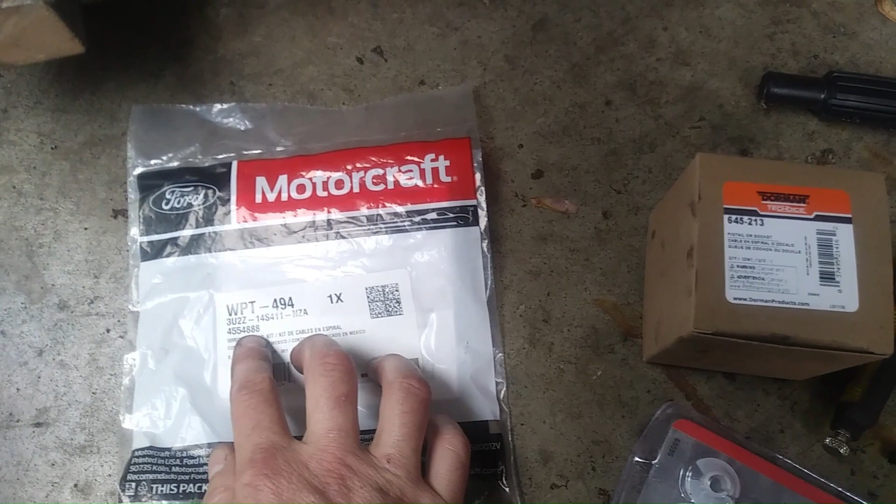There's two connectors. This is one - it was actually about $30, which I just bit the bullet and bought. This is off an 04 Mustang. There's two different styles I've seen. This one has two pins that clip over it. There's another one I've seen that's like a round barrel that slips over two threaded studs. That one seems to be a little more common and cheaper, but unfortunately I got the more expensive one, so that's for the backup lights.

This is a Dorman part number 645-213. This is the one for the speed sensor.

So I was just watching Pierre's videos - he has videos 1 through, I think, 17 or something. In his SWAP video number 6, he goes over the transmission. His car is an 03, this is a 2010. He also has another video on 05 plus cars having to do one more wiring fix up at the ECU. I think the reason is what we're about to go over.

This rear sensor is the vehicle speed sensor for the speedometer. If you look, it has two pins, but there's two blades on top. This one right here, underneath this little bracket, I think is the sensor Pierre's talking about, which is missing on the older cars. This is a 2010, so it has this, but older vehicles don't. So I think this is what the ECU is looking for, and the workaround up at the ECU end is getting around that.

So we're going to do that later. We're going to look for this connector, and they look very similar actually. You can see these ones are wider and pointing to the side. These two ears are narrower and pointing up. So we're looking for this guy, and then this is your reverse park neutral.

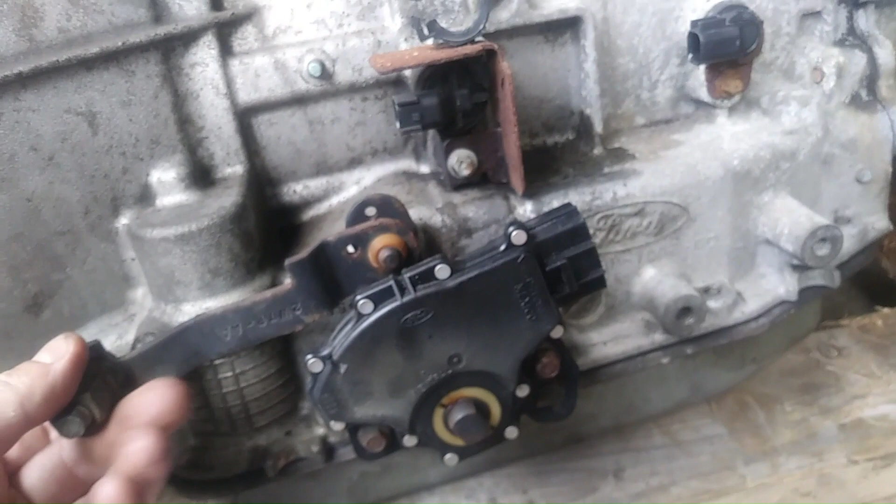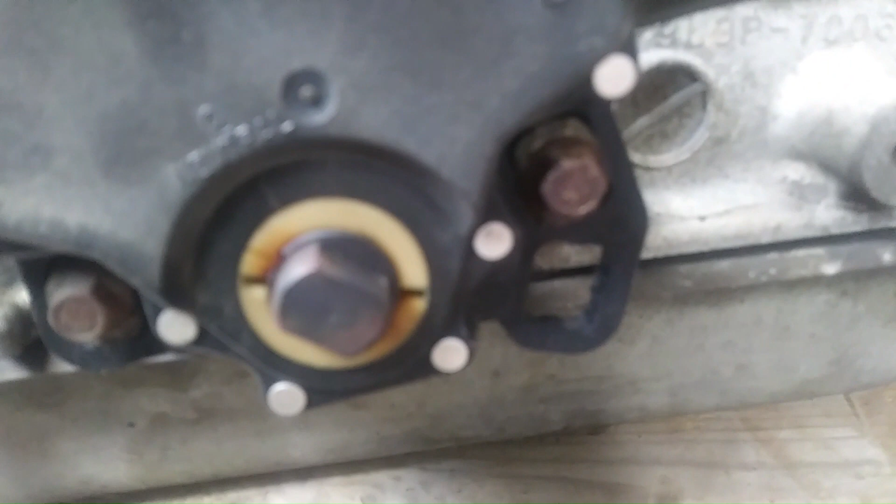You can see here on the side it says neutral, and there's a line, and a line on that yellowish white, so I'm going to pull on this. It's changed gears, and you can see the little straight edge is no longer on neutral, so I think that's low gear, like first gear, whereas all the way back is park, and then that's reverse. One click up would be neutral, and neutrals are aligned. Drive, and there should be second gear, then first gear.

So what I need to do is, when we're in reverse, which would be one click all the way back, we have to find on the connector that slides into this guy underneath the car - there's two pins that we have to get.

So the first thing we're going to do is just focus on the speed sensor. That's easy - all we do is cut the connector off the car harness and solder on this connector, and that's all that is. Very easy. That's what we're going to try and find and do.

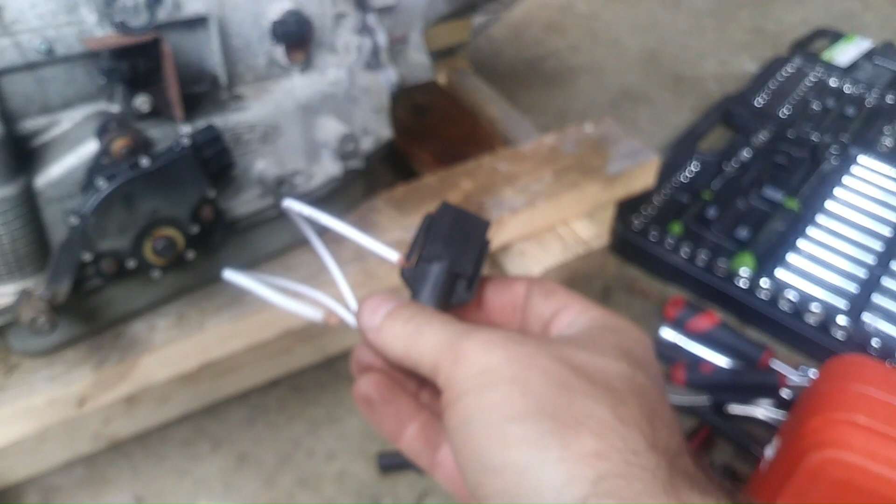So here it is here. Pretty straightforward, just two wires, and it shouldn't matter which one goes to which. They're both white, so either wire can go to either wire, I think. So all we're going to do is cut the connector off the car harness and solder this guy in, and then find which pins we need to tap into to get our reverse lights. So let's work on that a little more.

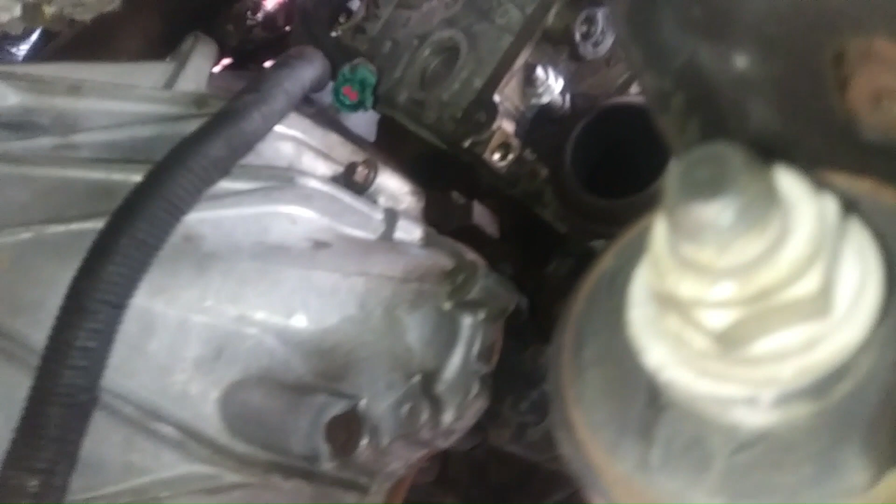Alright, we're under the car. As Pierre said in his video, on the older cars this harness comes out with the trans. On newer cars like this one, it stays with the vehicle. You can see up there, that green one is for the upstream O2 sensor on the passenger side, and then this length jumps over the hump to the other side, and now you've got your other green for the driver's side.

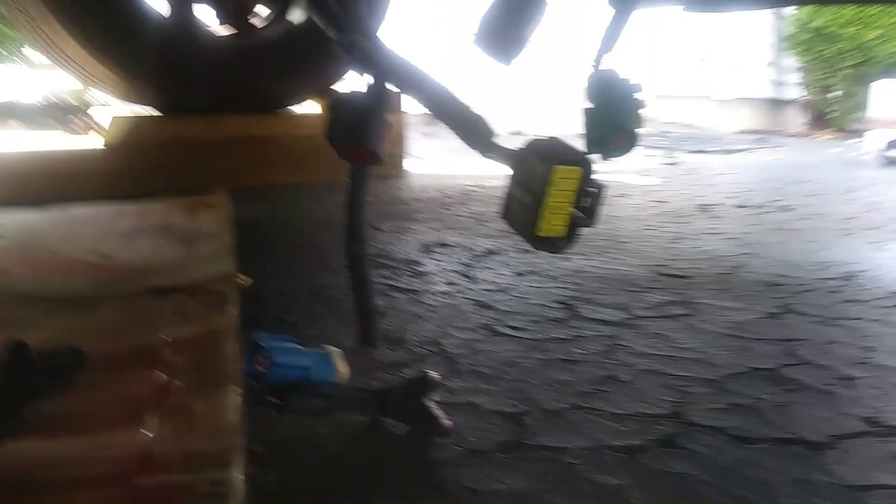Upstream sensor. The blue connectors are for your downstream - there's one, and then there's another one over here. So there it is there. This guy we're not going to use because that plugged into the spot right behind the fill tube, the fill dipstick, on the automatic. So I'm not even going to bother with that.

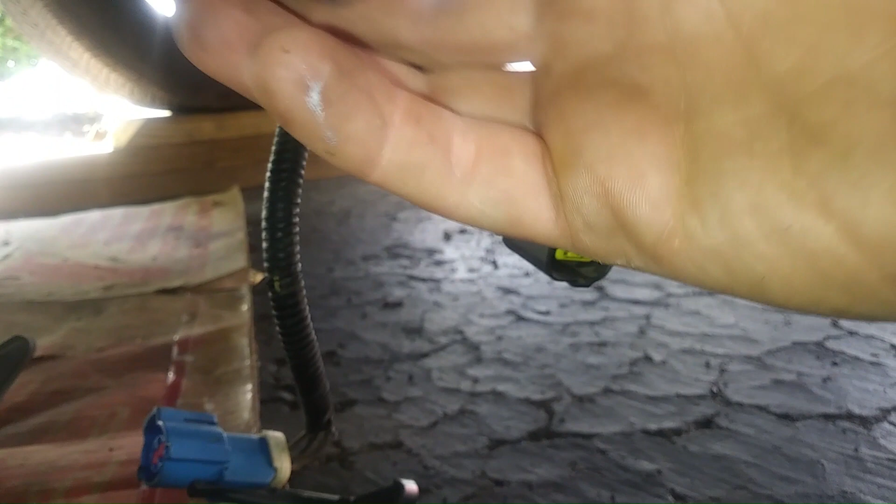And so then that leaves this guy. This is the one we've got to find the 2 pins for the reverse lights. But then there's these 2, so these are the 2 we've got to figure out which one is which. And if you remember, it's the one that's got the narrower of the 2 blade spades on it.

If we look right in here, you can tell that the one on my left hand. Let's just verify that one more time. I've got the spade blade thingies, the alignment keys, facing up. The one on the left is the one we need because it's skinnier. It's got the skinnier one, and those ones are wider.

But also, the skinny one runs up and down. See how the red... is it one on top of each other on the left, or is it on the right? They're next to each other, up, down, left, right kind of a thing.

So let's just verify on the transmission again before we cut this off: the connector pins run up, down with the alignment key blades, and the other one, the wider one, would be more of a left-right configuration. So let's go back to the trans.

So if we look, yes, I'm not sure if you'll be able to see that, but you can see the skinny ones are going... so here's the direction of the key, up down, and the pins are up down.

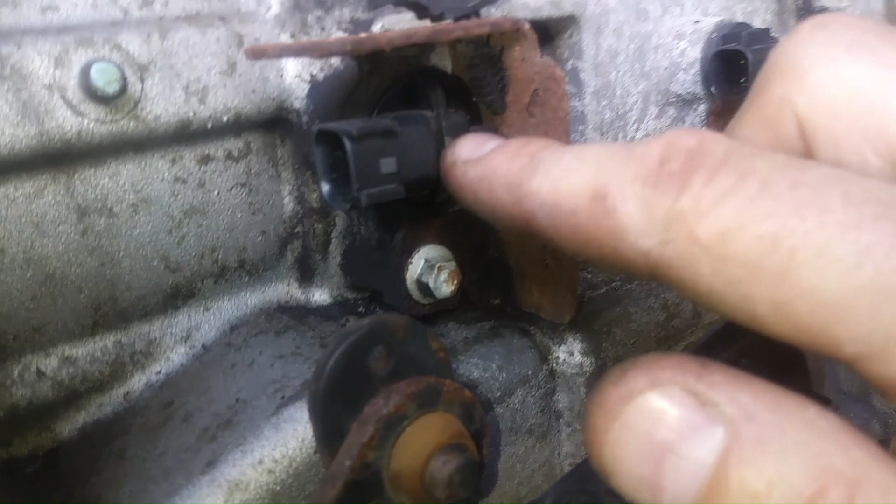Whereas the front one, which is the one we don't want, you're really not going to be able to see that because my camera lens is on the right side. But this one's got the wider spades, and it's left, right. So it is that one.

Okay, so let's cut that one off and solder in our sensor here. I don't think you need to see me solder it, but we're going to do that with the shrink wrap and the heat gun. So I'll get that one done.

All right, so we've got the vehicle speed sensor, the speedometer one, soldered in. So that's done. Now we have 4 more wires to worry about, for 6 wires total. Those remaining 4 are going to be on this.

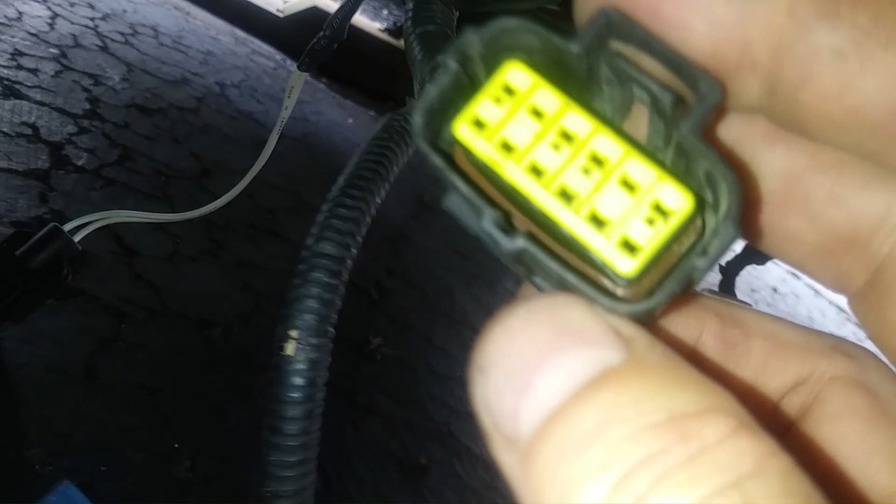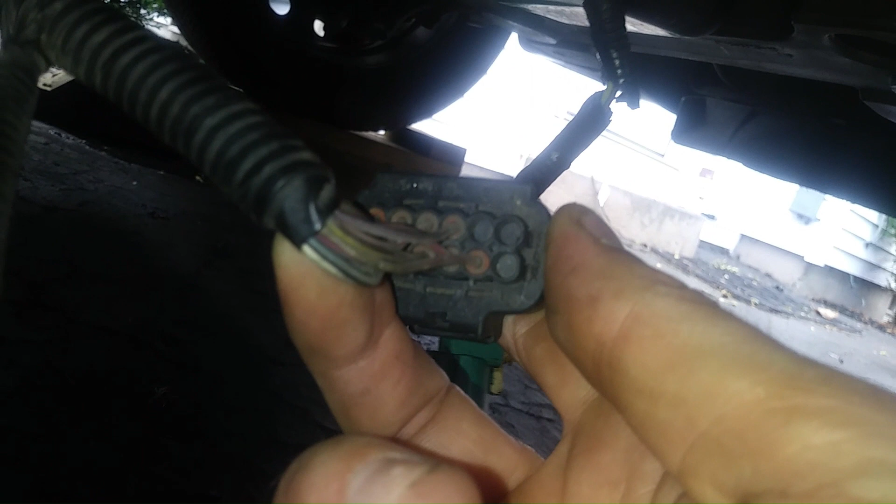This is the transmission range selector. If you look, you can see that there are 2 on the upper row and 1 on the bottom row that are unused. So we're gonna just flip it like this. That means that on the bottom right, those 2 are unused now, right?

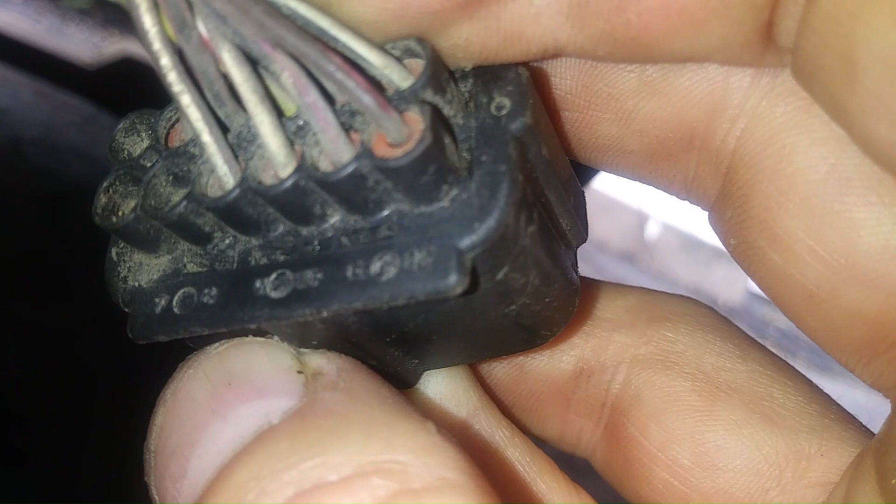Yeah, and if you look closer, you can see that there are numbers on it. You can't see, but well, yeah, you can see: 7, 8, 9, 10, 11, 12 is what that says. See, 12 is right there, 11, 10, 9, 8, 7. So 10 and 12 we have to jump together.

So 10 and 12 is going to be this one, 11, 10, and then so that one, you know. So 10 and 12 would be for either, if you're going to run a clutch switch, a safety switch, you would basically take this corner one, skip one, and go to that guy. So that's 12, 11, 10. And you'd clip them from here, and then you could run 2 wires up to your clutch pedal, to the clutch safety switch.

Or you can do what I'm going to do. This is the less safe of the options, but I've never had a vehicle with a clutch safety switch, and I'm used to driving them without it. Plus, I like starting the car with the clutch out, so you're not stressing the throw-out bearing and all that stuff when trying to start the car.

So all I'm going to do is for pins 10 and 12, cut the wires maybe about 1 inch up and then solder them together on the harness side. That'll be my clutch safety switch, or safety switch. But if you're going to do that, remember that the key will start the engine regardless.

So, you know, be careful with that. Just keep that in mind. But that's okay because that's what I've always done. So I'm gonna get that done. Then the only remaining thing is the reverse lights, which we'll talk about in a second.

Okay, so what I've done here is the pins 10 and 12 I trimmed.

All I did on the harness side is twist the wires together, solder them, and then put two pieces of shrink wrap over it. So now our clutch switch has been, I guess we'll say, bypassed, and the car will start.

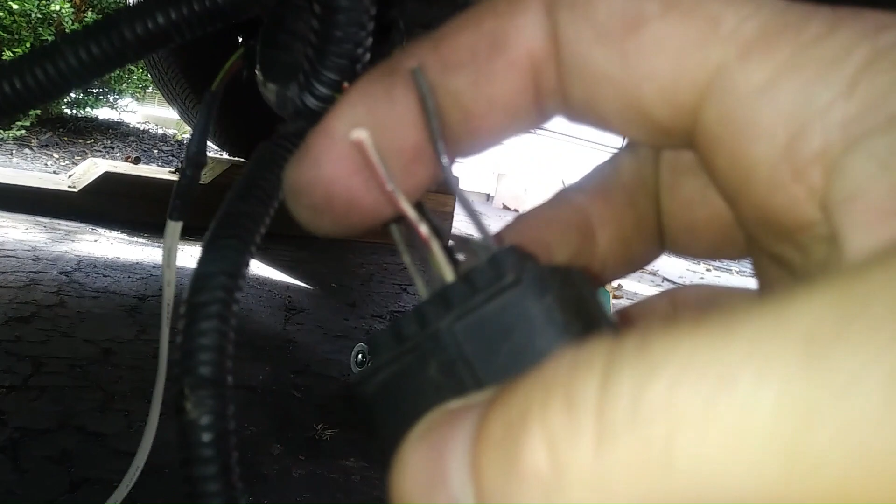The only remaining two wires we need—remember how I said there were six—we've got two here, two right there, and the remaining two are on this connector as well. We'll tuck these to the side, and if you look, there's only two more wires on the bottom row, and those are the ones we need. So 10 and 12—12 would be the far right one, 11, 10—so 10 and 12 we did, but now we need 9 and 11. Remember, too, 7, 8 we don't use, so 9 and 11 are the other two we need. Number 9 is power in, and number 11 is to the reverse lights.

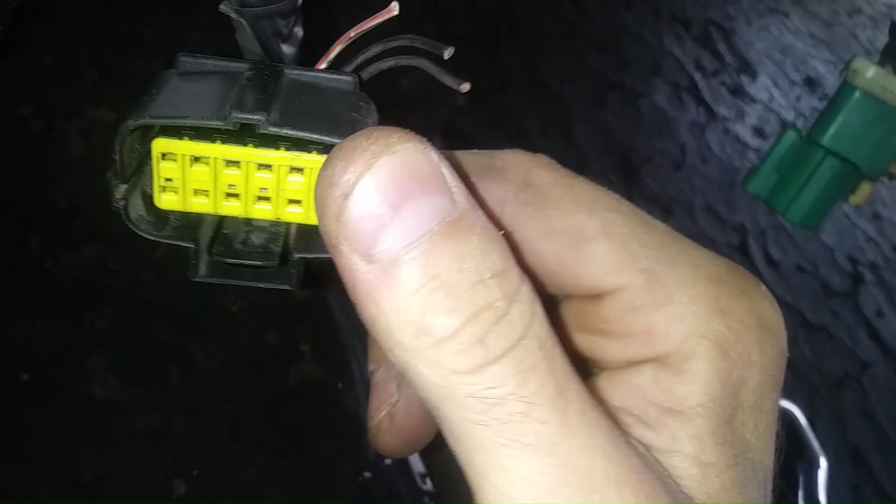What I'm going to do is unbolt the switch from the automatic, plug this in, and zip tie it up there. And then the other two wires are these two. All we did, if you remember, is snip off the automatic transmission connector and then connect this one in. It didn't matter which wire went to which. So that's the wiring you need to do.

What I'm going to do now, since it comes down the passenger side—since I don't have the cross member in, I've just got the jack, and I've got a lot of room now. The transmission is low, almost hanging off the motor mount, so I'm just supporting it barely with this. I'm going to loop the wires up over it, get everything connected, secure it a bit with zip ties, and then we're going to put the cross member in.

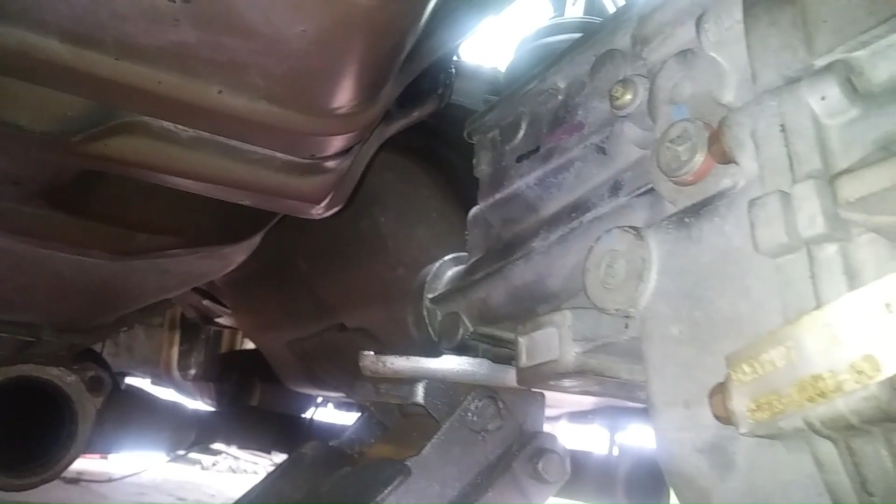All right, I've got the transmission in. It's all in there—cross member's back in, transmission mounts in. I lined up these holes; these are the two transmission cross member bolts, and those are in. I can show you what I did here.

There's the wiring loom for the transmission right here. You can see it's not caught or pinched—it's low enough so we've got clearance. Here's the upstream for the passenger side, and the downstream for the passenger side right there, and that's not going to be used.

We got the cross member in. See how we had to bring these holes towards the back of the car? You can see that circle is where the automatic mounted, right there, but that's right now where our manual is mounted.

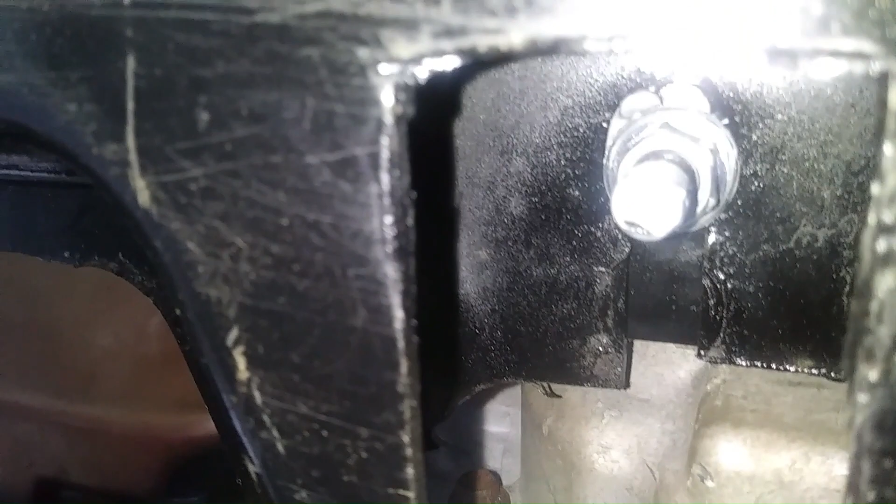This is the same transmission mount as the automatic from the Crown Vic—this is not a Mustang trans mount, it's the Crown Vic automatic trans mount. Same bolts as out of the automatic are holding it in. You can see that everything clears. That's the trans mount, and this is the cross member.

The only other thing—that little nub I was telling you about—that clears. The only other modification I had to make was right here; I had to cut about a quarter inch off. Remember when we cut the cross member, I just lined up the blade with the end of the holes. I should have taken it a little farther back, farther away from the transmission. Now there's clearance—you can see there's about an eighth inch of clearance, which is good.

Wiring—we've got the speed sensor hooked up, and then this stupid thing, this is the reverse connector I was talking about. This $30 connector I paid for wasn't the right one, so I'm working on getting it to work. I think it's too long, and I just need to trim it a little and open up the connectors so they'll slide over those pins, and I think I'll get it to snap in.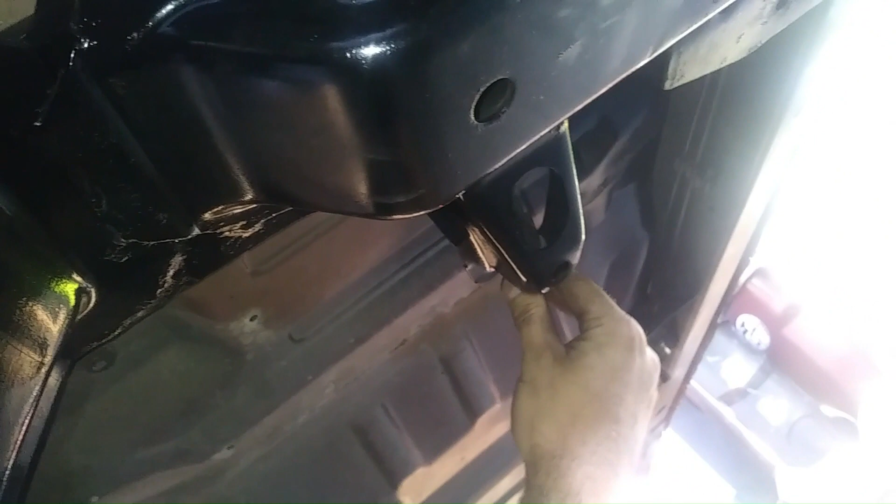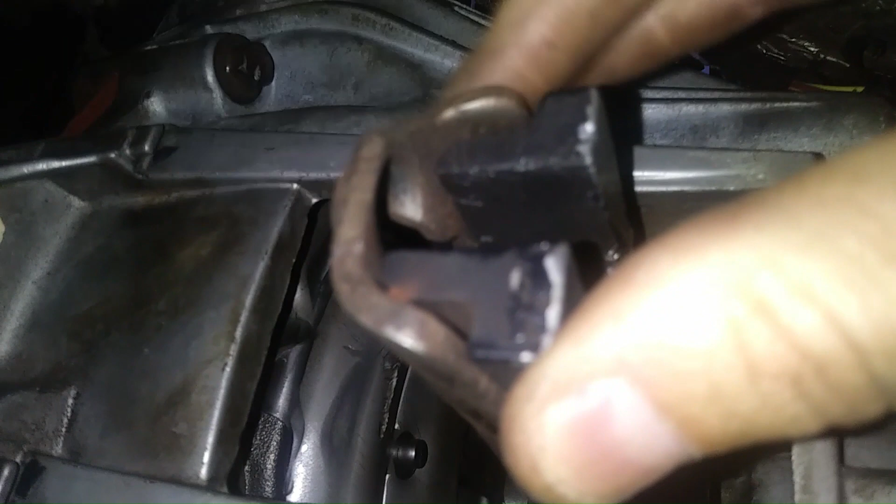So the next thing we need to do is the clutch cable, the pedals, and then I've got to finish putting the rear end back in. But the one thing we need to do first is the drive shaft. From the rear you can tell that everything clears nicely. Up here we had to clear—remember how we had to cut that out in that part of the floor of the car.

So this output shaft, I put a new seal in, by the way, but this is a 31 spline, and the automatic is a 28 spline. So we had to get a new yoke, and I have that. So we have to change it.

I'm going to change the U-joints front and back, but the front U-joint needs a conversion U-joint, and we'll go over that when we do the transmission drive shaft U-joint change. But as far as the transmission swap, it's done, it's swapped. So let me show you from inside the car.

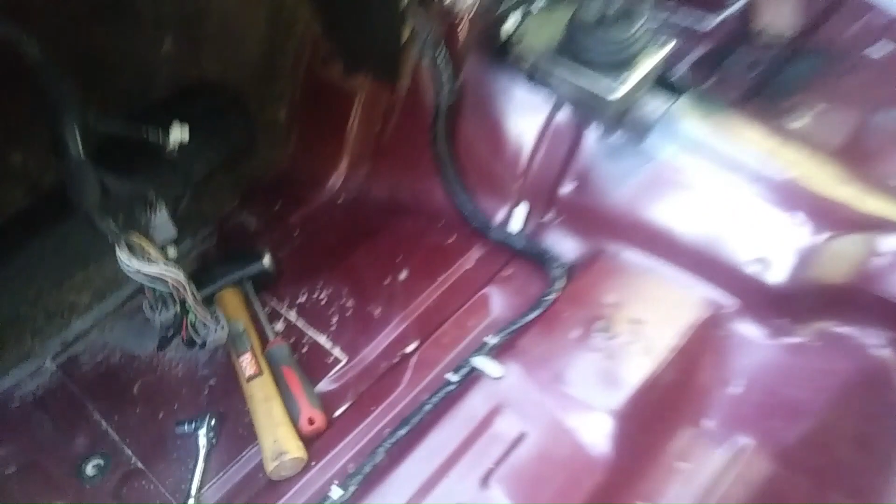So here it is, I'm just going to climb in the car here and we'll show you. So this is, I think, a stock Mustang shift handle. So that's neutral, so first gear, I mean we're pretty close to the dash. I think I might get another shift handle, but just to get it on the road, this one will work.

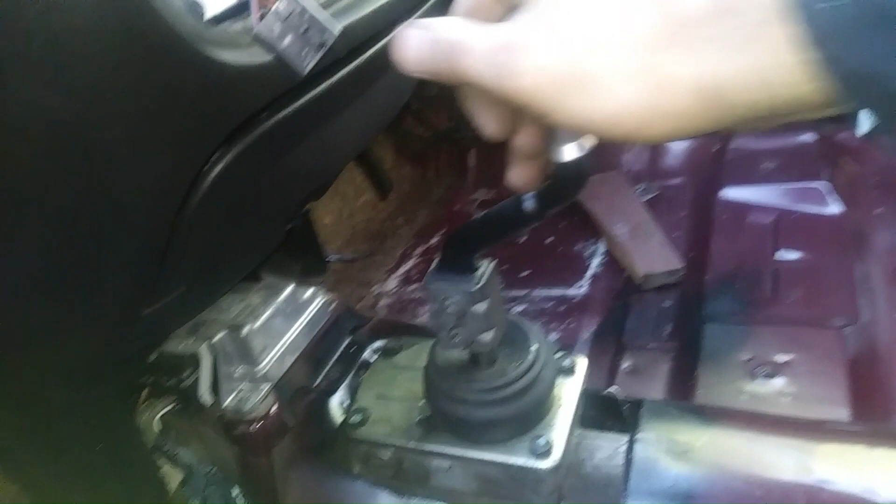So this will be third gear, and we're pretty close there, so your hands are gonna punch the dashboard. So I think I'm gonna have to come up with something else, but for right now it should be fine. I think I might get a Hurst or something, or maybe even just cut this and weld a piece of pipe in there or something just to space this back a little bit longer. That would work too, so maybe I'll do that.

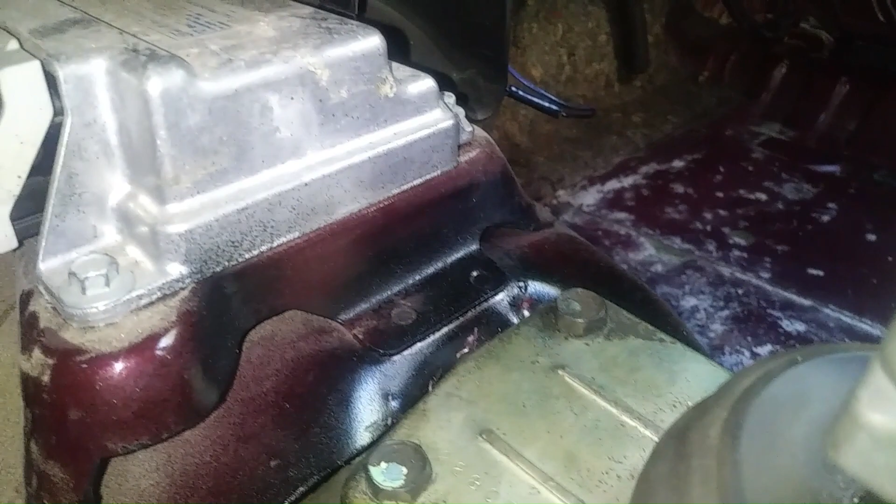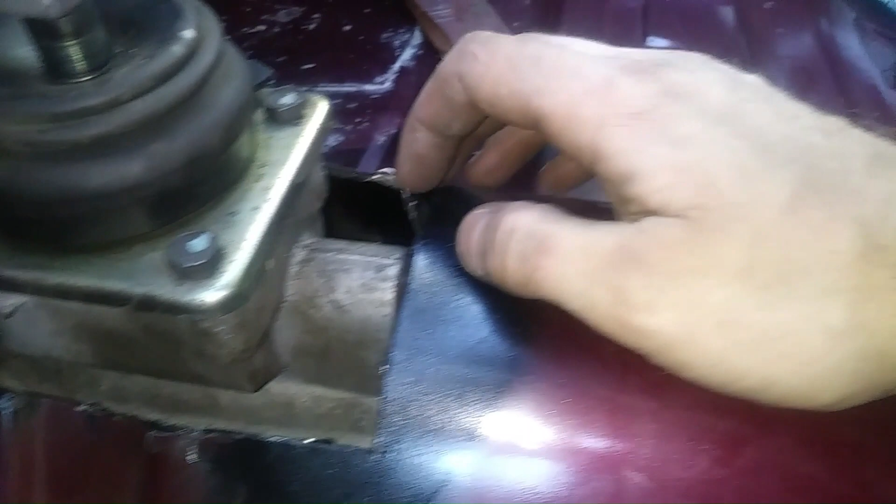I just wanted to show you what it looks like inside the car. For some reason, I know Pierre did his video and said an inch back from this little tab is where the hole should be, but I don't know if my body is farther back or something on this frame. Mine, I took a screwdriver and just tapped the sheet metal because it was rubbing the shifter here, so I bent that down to get clearance. This hole's a little bit too far back, but that's okay, the width is good.

Here's the passenger side, nice clearance all the way around.

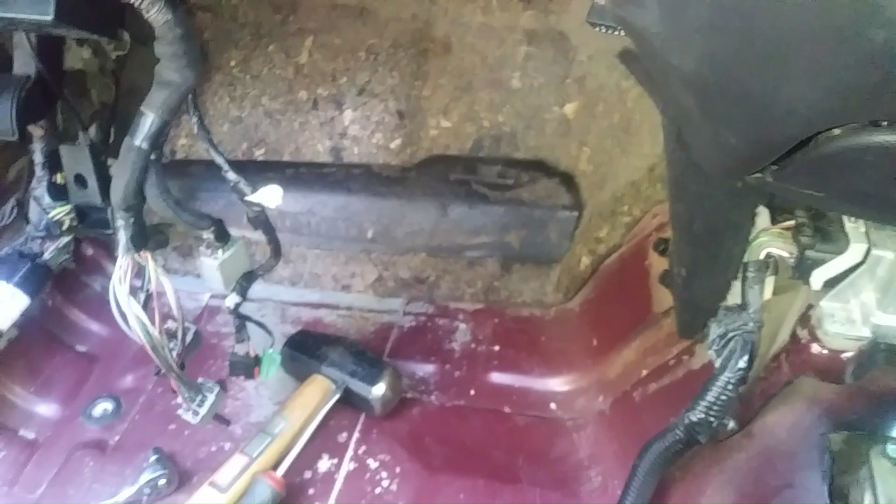That's it for today, I think. Next, like I said, is either the rear end I'll put back in, or I'm gonna do the pedals. I guess I'll come up with a plan tonight, and maybe tomorrow I'll keep working on it. So I'm happy with it, the swap. I think all the hard stuff is now done. Got the newer transmission in it, so that's good. When we fill oil through here, that's the easier part to do, but we'll go over that later. So thanks.

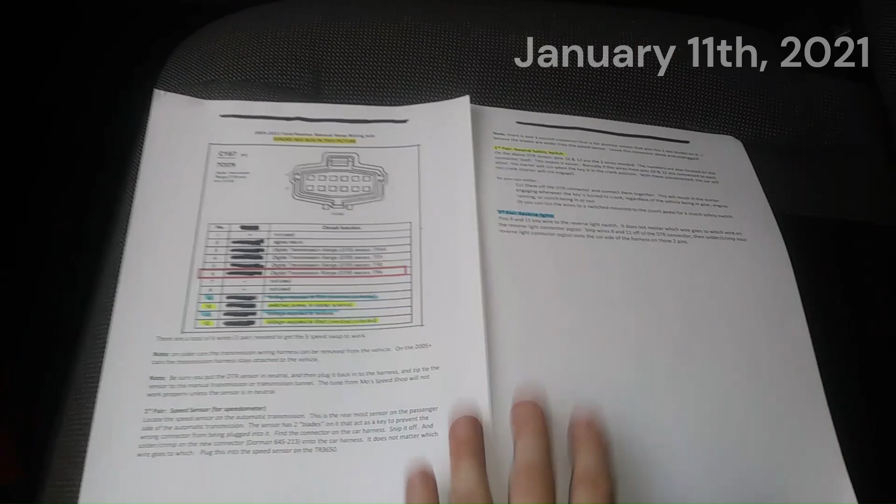Okay, just to make things easier, I think I was being a little bit confusing when I was trying to explain how to do the transmission wiring for the 5-speed swap on the Crown Vic when I was actually doing it underneath the car. So to avoid any confusion, to make things simpler and easier, I've made this cheat sheet, and we can kind of go over it right now.

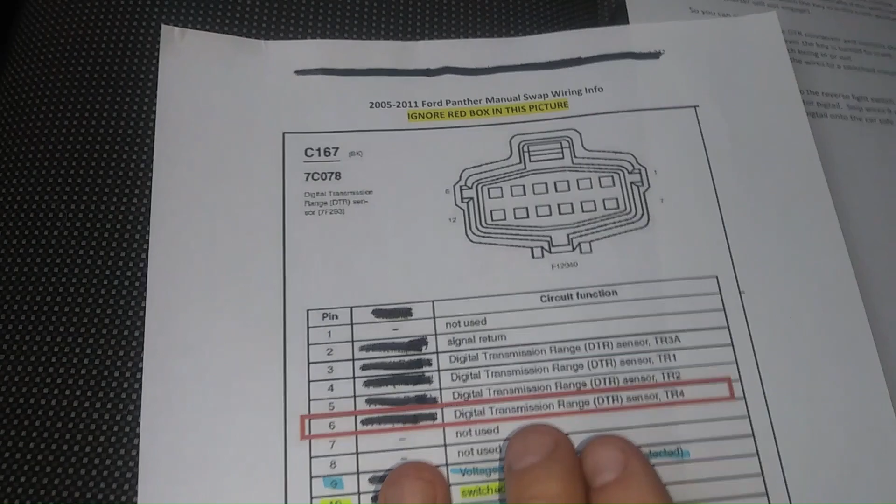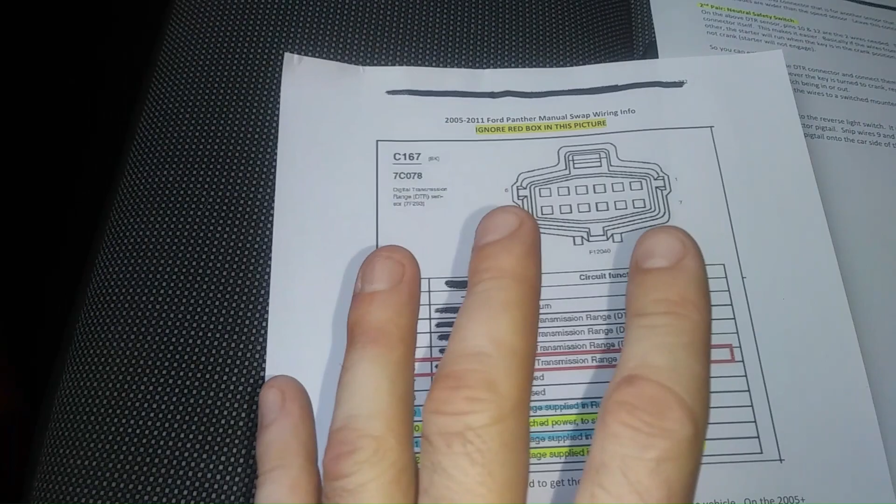So on the first page I've just got the title: 05 through 11 Ford Panther manual swap wiring. Ignore this red box, this picture I had to get off the internet from a separate discussion that doesn't relate to this, plus we don't even use this wire anyway. I've grayed out the wire colors because the connector is from an older car, so the wire colors have changed but the pins have not. I also color coded it for what we're going to talk about in a few minutes here.

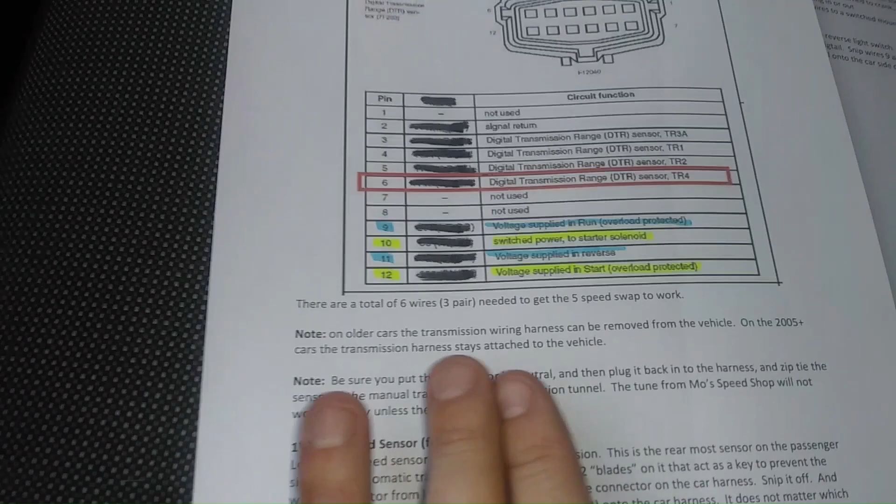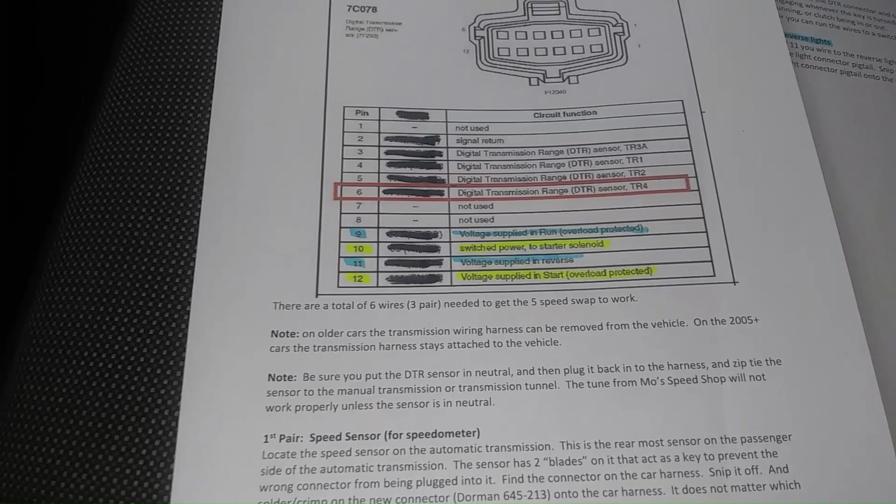Before we get started, I want to go over some preliminary notes. There are a total of 6 wires you need to worry about on a transmission, 3 pairs of them. On the older, pre-05 cars, the transmission wiring harness can be removed with the transmission, so you could work on it outside the vehicle. But on the newer ones, like the one we worked on, it doesn't - the harness stays with the vehicle, so you have to work on it underneath the car. It's a little bit harder to do that, but it's really no big deal.

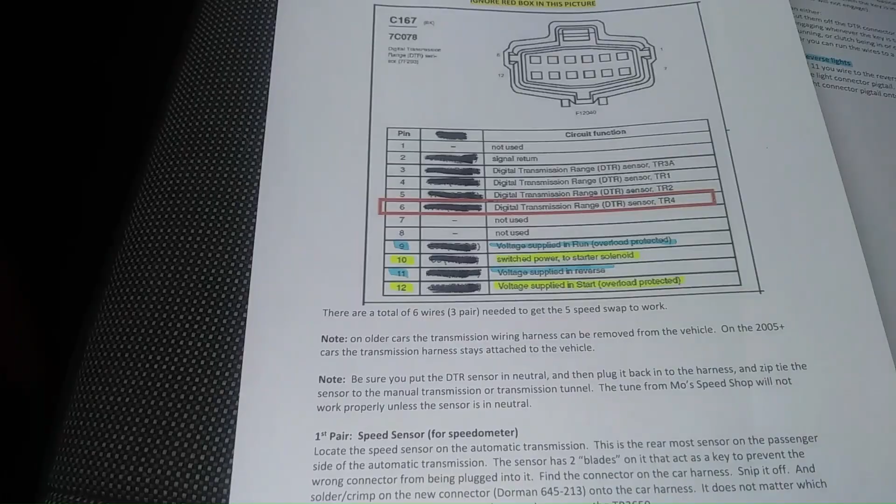The last note I want to make is that when you're all done with the wiring, you want to take the sensor off of the automatic transmission. There's some bolts that hold it onto the side of the transmission, take that off, and then put it in neutral. There's a white barrel with a line, and then there's another line on the black housing, and you align the 2 lines, and then it's in neutral.

Let's talk about these 3 pairs of wires. The first pair doesn't use this connector in this picture - it's for your speedometer, and it's a separate connector, and I actually kept it. Here it is, I saved it in my glove box.

Kind of a good thing I did.

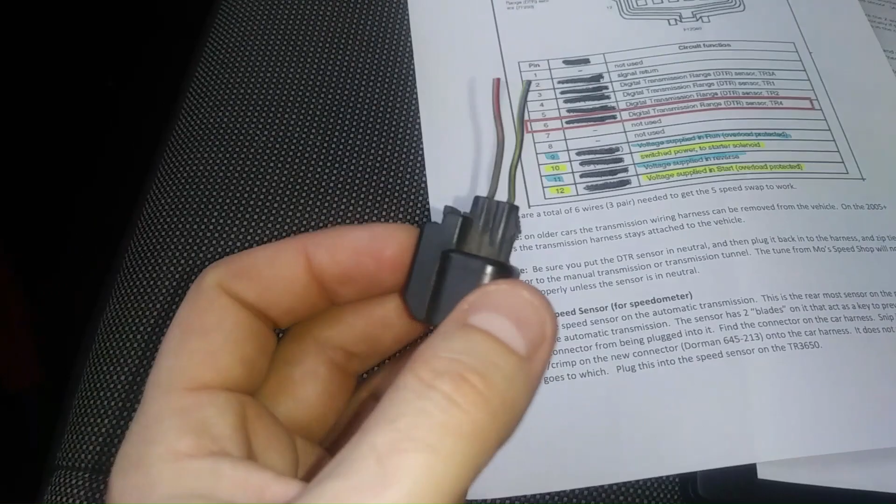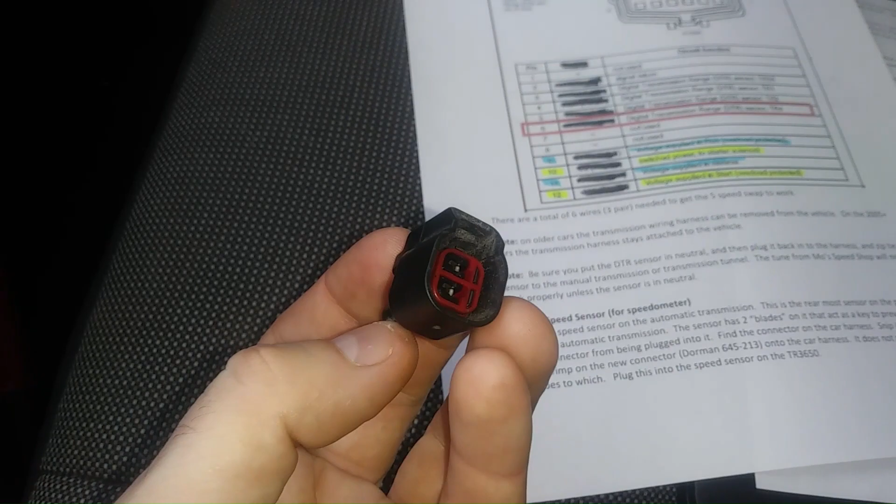Basically what you do is find this connector on the vehicle harness and snip it off like I've done. You find it because it's the rearmost sensor on the passenger side of the automatic transmission. There are actually 2 connectors that look pretty similar, but they are different, so make sure you get this connector and don't snip the other one off, because it won't work properly. You do need to worry about that other connector in a later wiring video we're going to talk about.

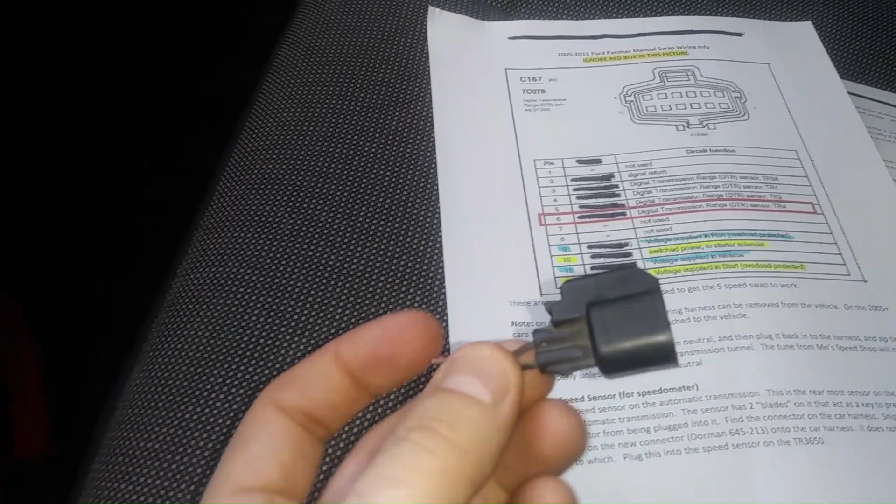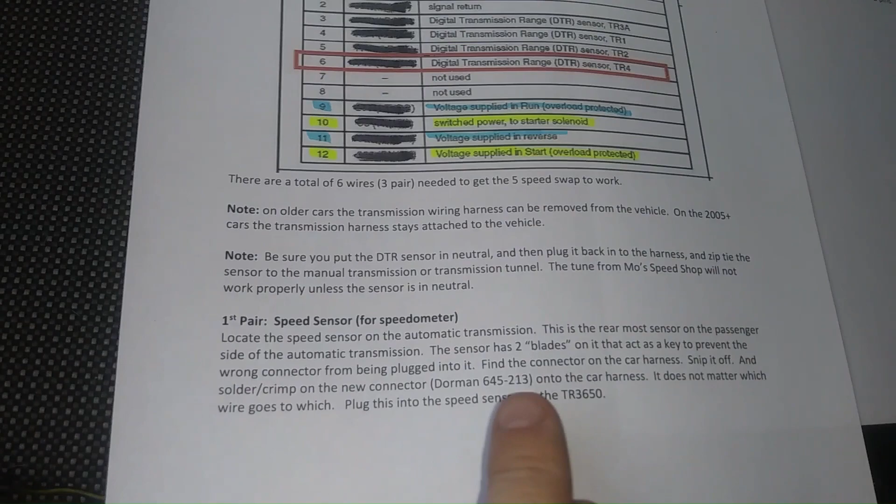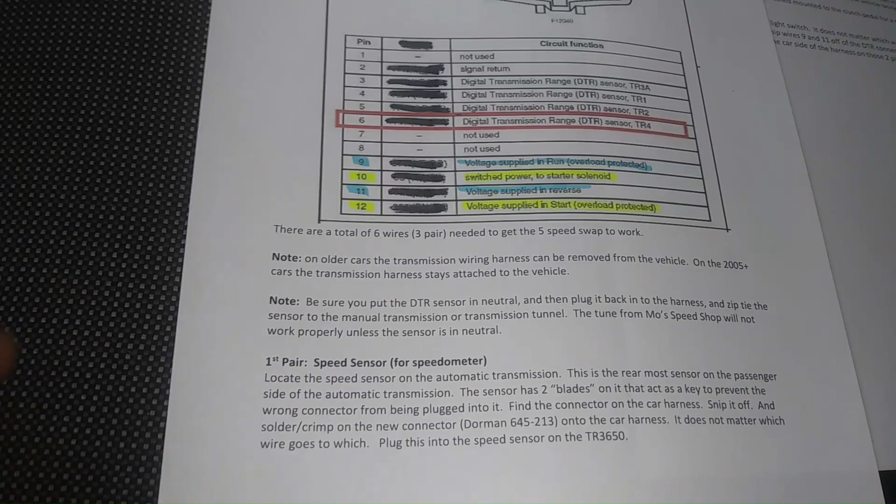But just for the transmission portion, look for this connector, snip it off, and then solder on the pigtail that you bought for the Mustang, Dorman part number 645-213. That's the Mustang pigtail for your speed sensor. It doesn't matter which wire you wire to it, you just want to wire it to the car harness. So that's your speed sensor.

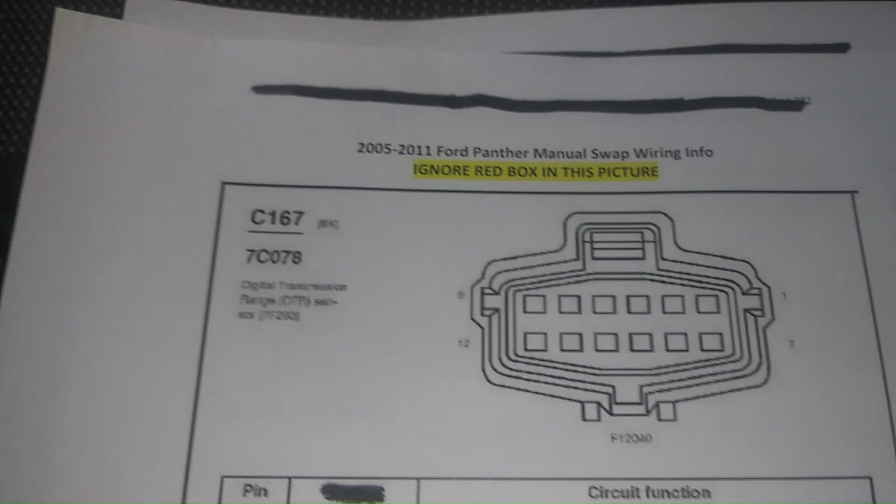The next thing we need is the other page, so I'll get these wires lined up for you. I've highlighted in yellow the 2 pins you need, pins number 10 and 12. You can either use the numbers on this sheet — you can see we have pins 1 through 6 on the top row and 7 through 12 on the bottom row, looking into the connector. Pretend you're the DTR sensor looking at the harness.

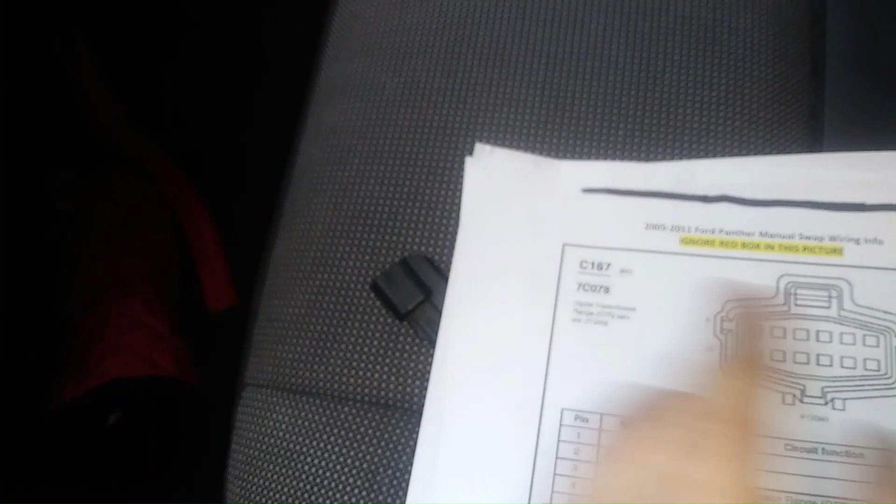Now, if you flip the connector over in your hands, you'll see the numbers on it, which makes it a lot easier, and you really don't even need this sheet. You just need to know that you need pins 10 and 12.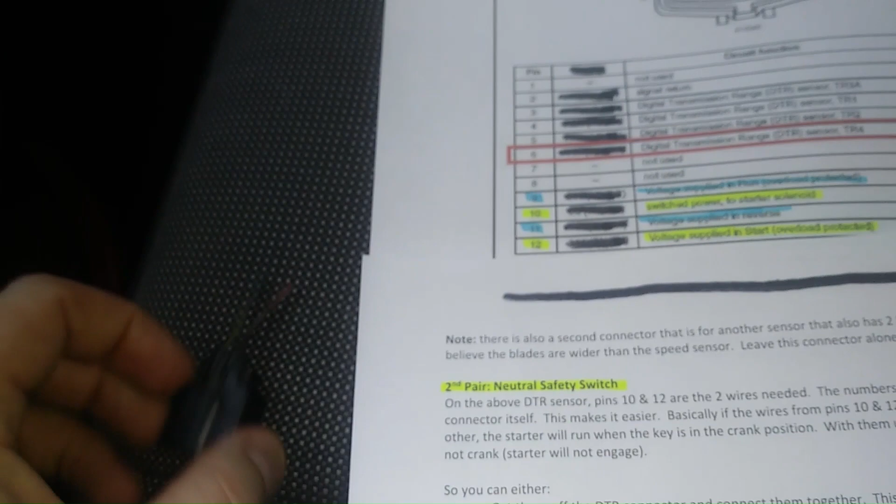So for pins 10 and 12, that's your neutral safety switch. What you do is cut the wire off of this big connector about 1 inch away from it, then solder your neutral safety switch, if you choose to run one, to those 2 wires that go up into the harness. Then you would run those 2 wires to the clutch and solder those to a switch if you choose to run a clutch safety switch.

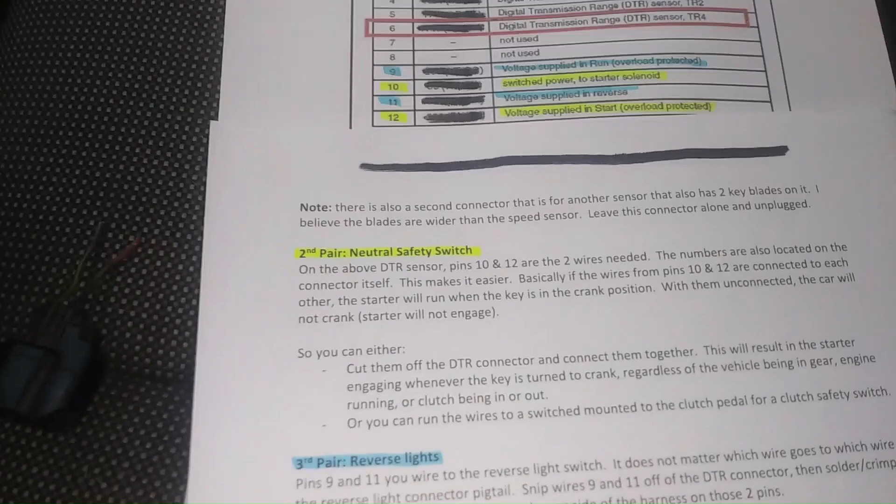Or you can do what I did — the easier way is to just connect those 2 wires together full time, which acts as your safety switch being bypassed, and everything will work fine.

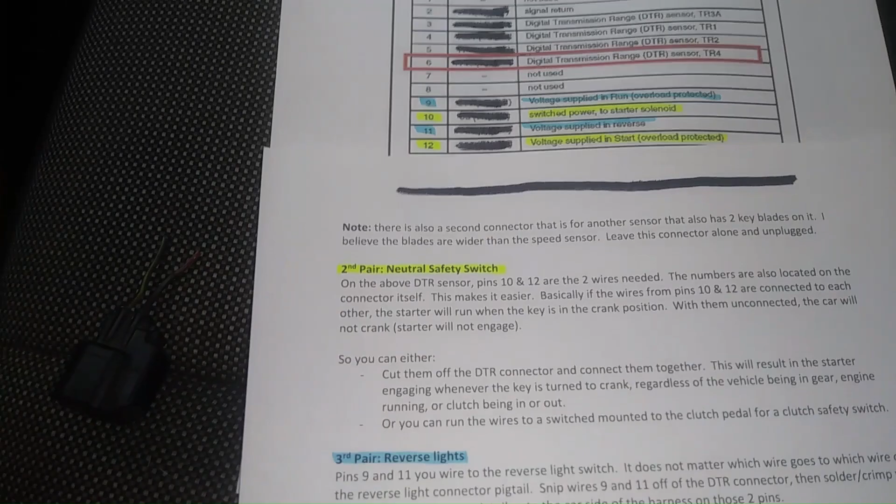Just note, if you do that, whenever you turn the key to crank — I'll do it right now, I've got the car in gear — it's going to lurch because it's trying to fight the e-brake. It will try to start no matter what. If the engine's running and you get the clutch up with the car in gear, just remember that if you hit that key to crank, it's going to crank.

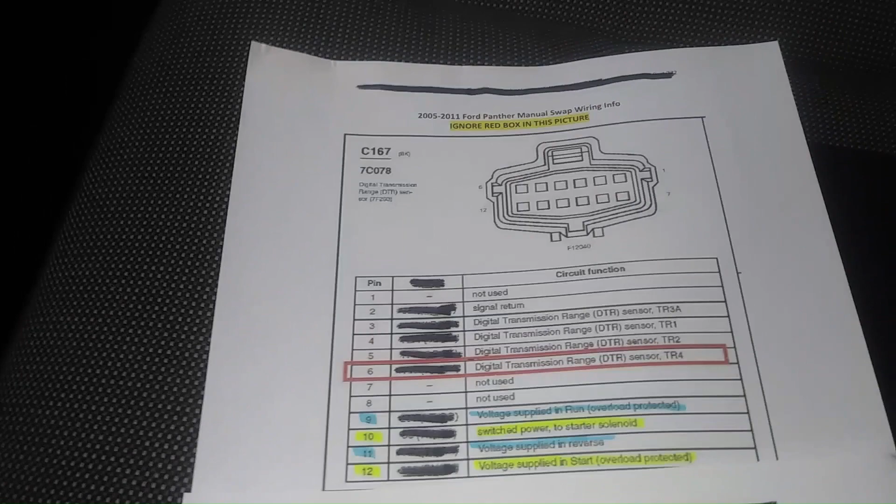So pins 10 and 12 are your safety switch, that's the second pair. The third pair is the reverse lights, pins 9 and 11. All you have to do is wire those to your reverse light pigtail.

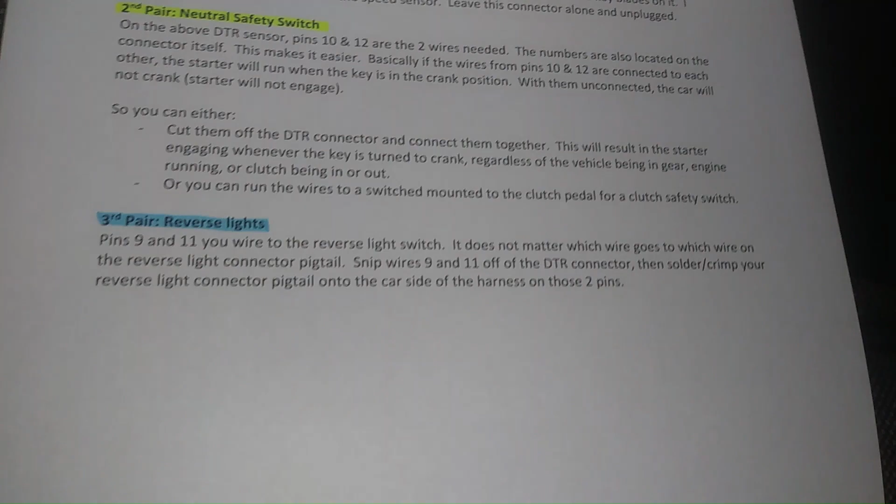There are 2 different styles. The cheaper and probably more common one looks like a round hockey puck with 2 holes in it — you press that onto the transmission, and there are 2 threaded studs on your reverse switch. Or the one that I had is a little fancier, like a 2-pin connector that hooks onto it, and that one is expensive.

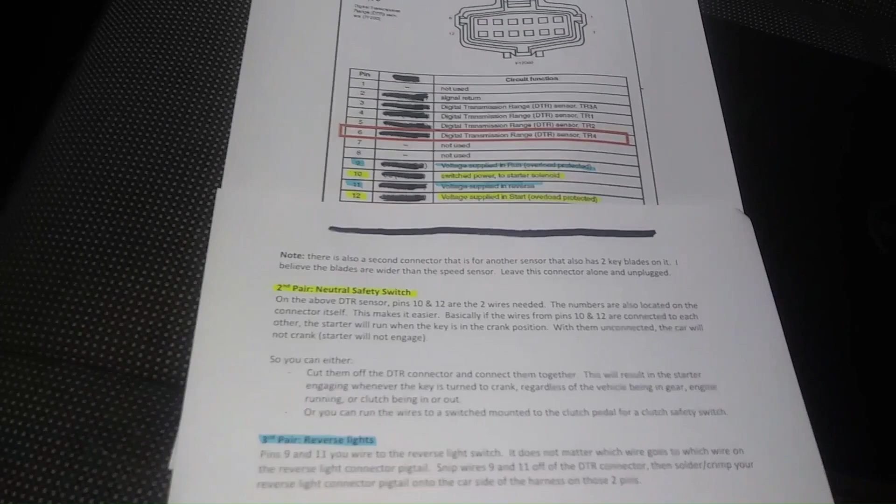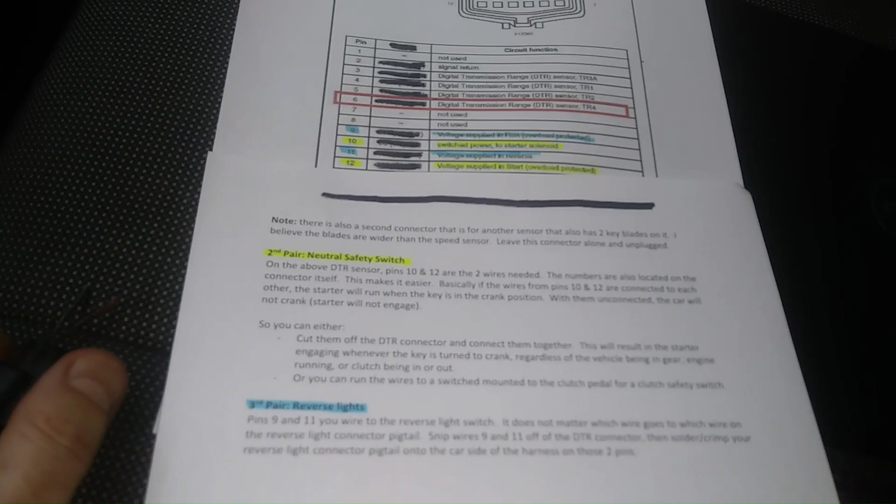But I was also able to find that it's the same connector off of a Tremec T56, which is the 6-speed still in production, found in Mustangs, Camaros, Corvettes, and Challengers. So if you can find that part number, all you would do is cut the wires off of this from pins 9 and 11, and solder your reverse light pigtail to the car harness side.

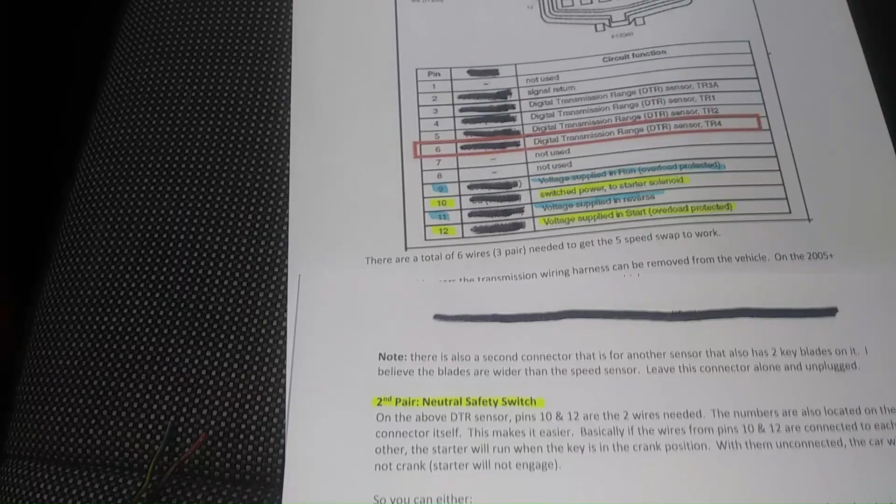It doesn't matter which wire goes to where on the reverse lights, and it doesn't matter which pin goes to which, like I told you on this one, and on the neutral switch it doesn't matter either. They all kind of act as switches.

Hopefully that makes things easier. Those are the 6 wires you need to pay attention to.

I will maybe do an overhead view of both pages so you can read them. Pause the video and read them.